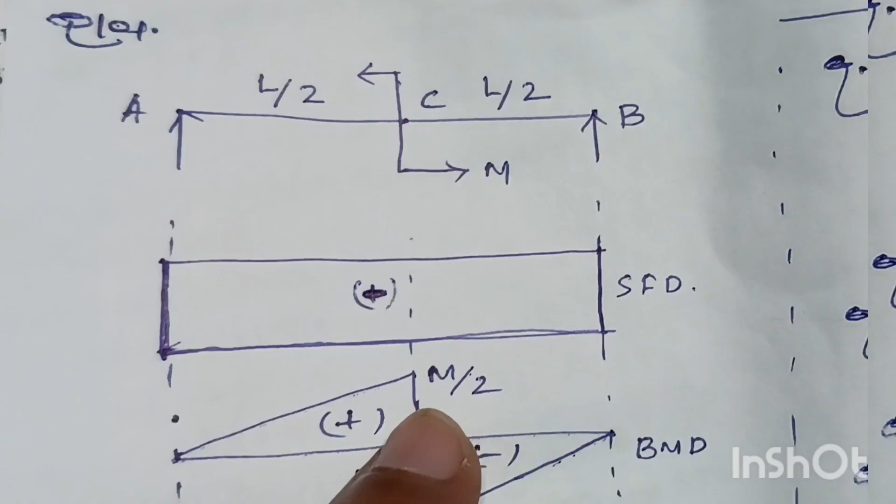Sudden change in bending moment diagram at the point of application of couple. At the point where the couple acts, there is a sudden change in the bending moment diagram.

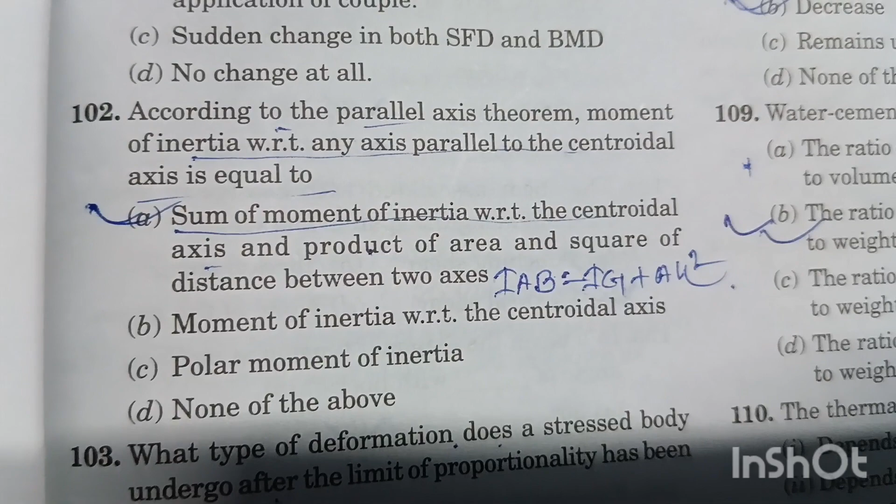Question number 102: According to the parallel axis theorem, moment of inertia with respect to any axis parallel to the centroidal axis is equal to the sum of moment of inertia with respect to the centroidal axis and product of area and square of the distance between two axes. Option A is right answer.

Question number 103: What type of deformation does a stressed body undergo after the limit of proportionality has been crossed? Plastic deformation. If the limit of proportionality is crossed, the body undergoes plastic deformation. Option B is right answer.

Question number 104: Saint Venant's theory for elastic failure is also known as maximum principal strain theory. Option B is right answer. Saint Venant's theory of failure explains the failure of a ductile material when subjected to stress, and it considers the maximum principal strain theory for failure.

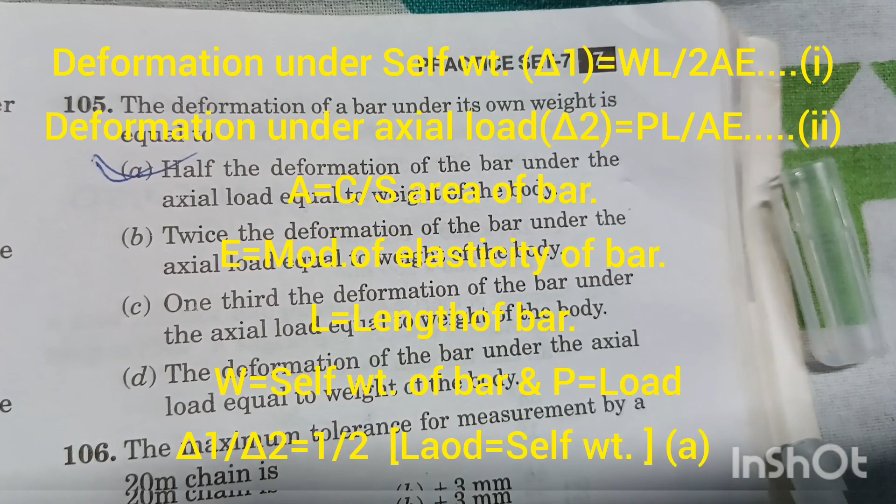Question number 105: The deformation of a bar under its own weight is equal to half the deformation of the bar under the axial load equal to the weight of the body. Option A is right answer.

Question number 106: The maximum tolerance for measurement by a 20-meter chain is plus minus 5 mm. Option C is right answer. Or plus minus 8 mm for a 30-meter chain.

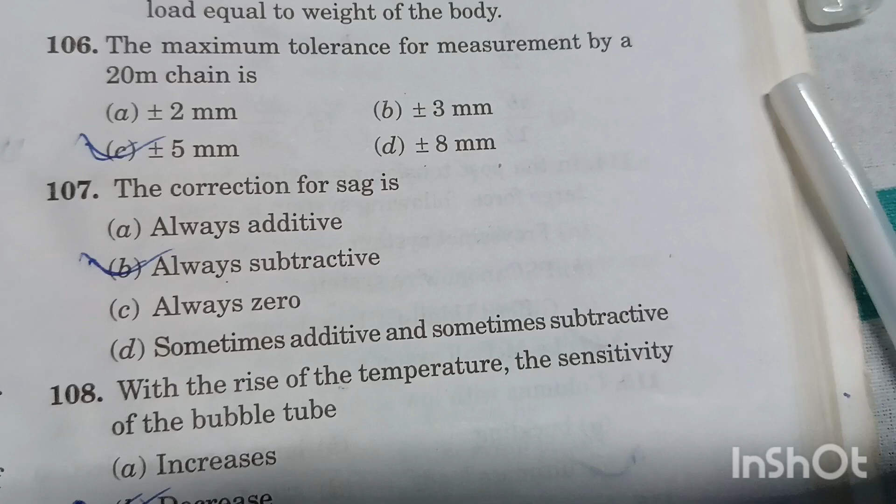Question number 107: The correction for sag is always subtractive or negative. Option B is right answer.

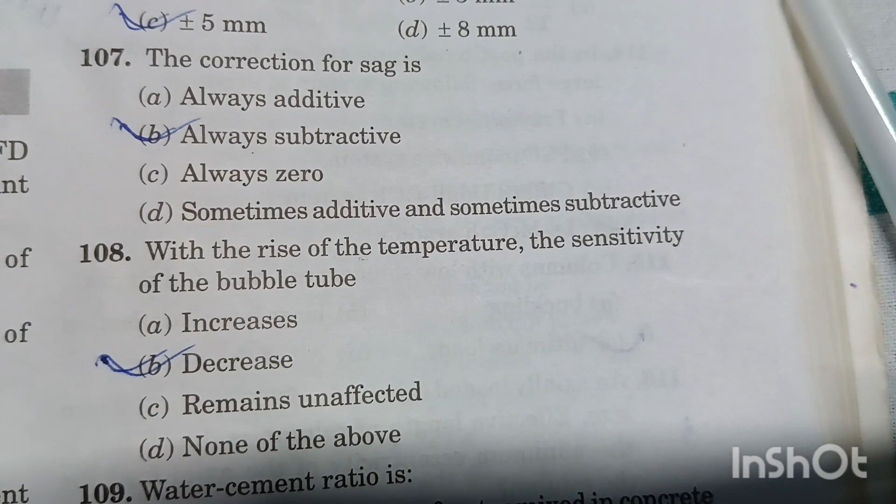Question number 108: With the rise of temperature, the sensitivity of the bubble tube decreases. Option B is right answer.

Question number 109: Water cement ratio is the ratio of weight of water mixed in concrete to the weight of cement used. Option B is right answer.

Question number 110: The thermal coefficient of concrete depends on nature of concrete, depends on cement content, depends on relative humidity, and depends on the size of section. So option D is right answer, all of the above.

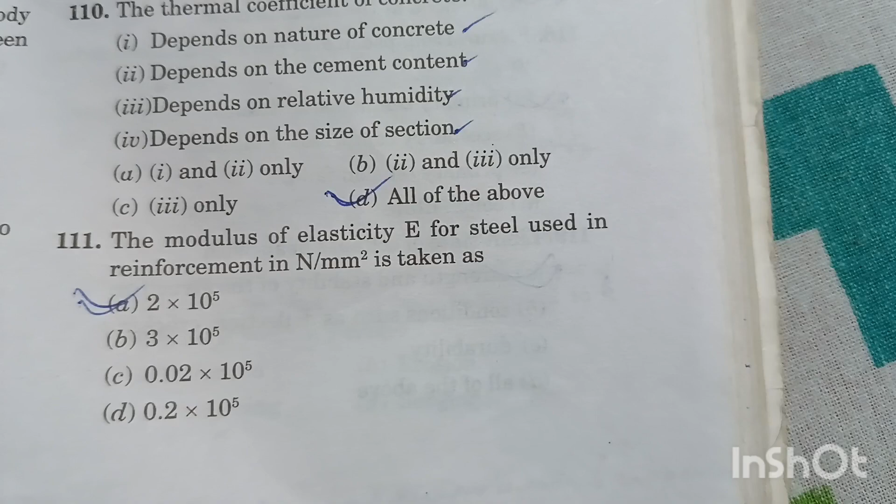Question number 111: The modulus of elasticity E for steel used in reinforcement in Newton per millimeter square is taken as 2 into 10 to the power 5 Newton per millimeter square. Option A is right answer.

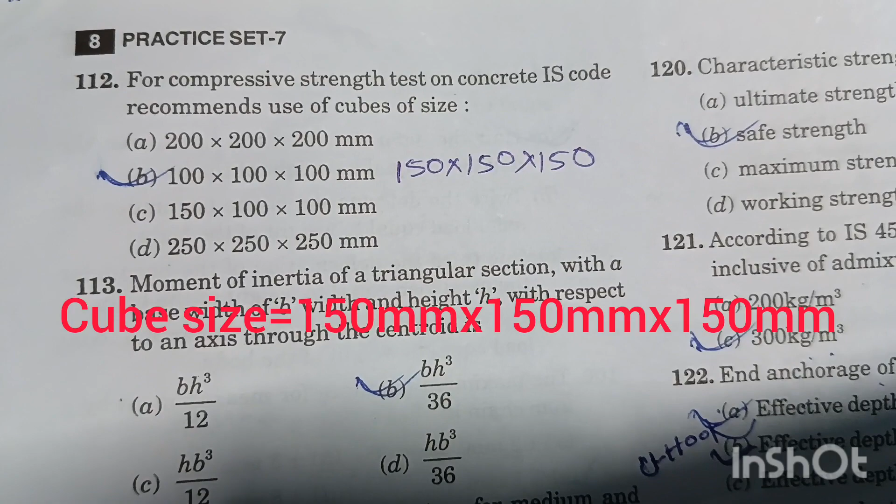Question number 112: For compressive strength test on concrete, IS code recommends the use of cubes of size 150 by 150 by 150. So option B should be the answer.

Question number 113: Moment of inertia of a triangular section with base width B and height h with respect to an axis through the centroid is BH cube by 36. Option B is right answer.

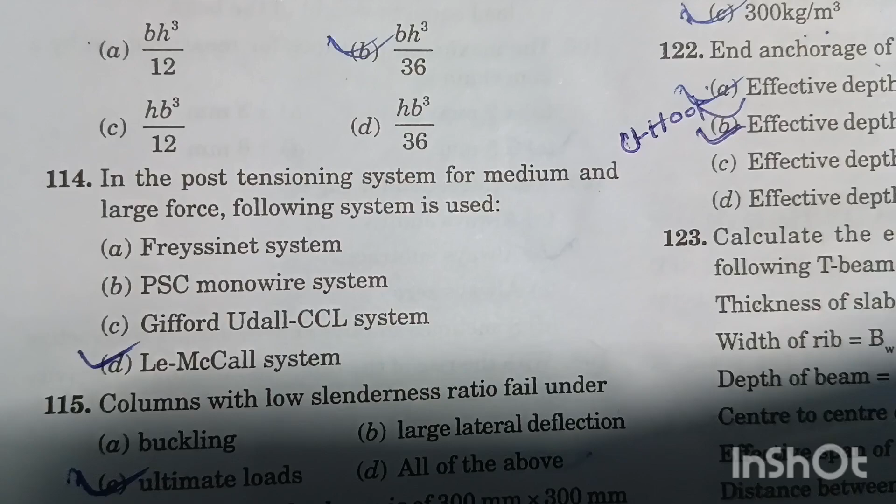Question number 114: In the post tensioning system for medium and large force, the following system is used: Le-McCall system. Option D is right answer. This question has appeared before, remember it.

Question number 115: Columns with low slenderness ratio fail under ultimate loads by crushing. Option C is right answer. Low slenderness ratio means a short column, and it fails by crushing, while a long column fails by buckling. So option C is right answer.

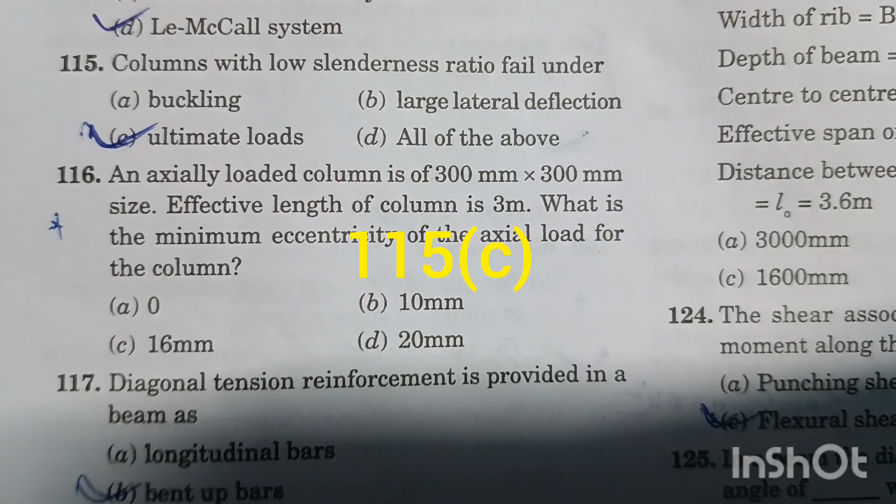Question number 116: An axially loaded column is 300 mm into 300 mm size. Effective length of column is 3 meter. What is the minimum eccentricity of the axial load for the column?

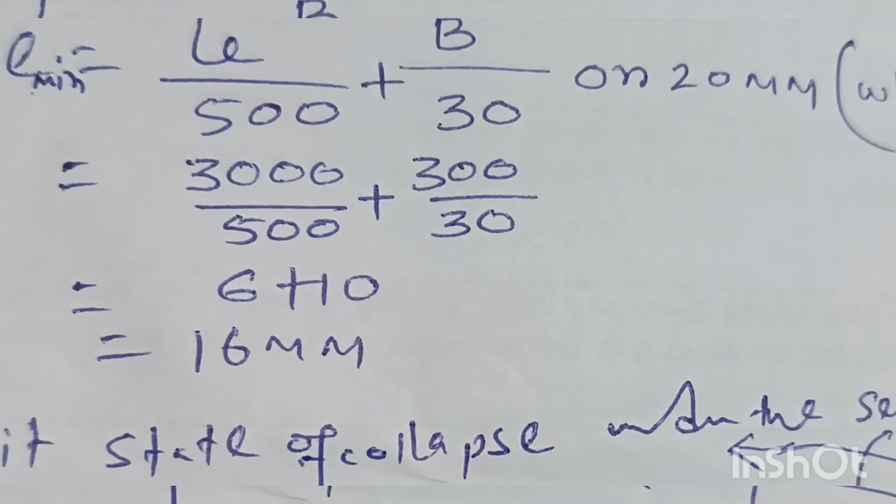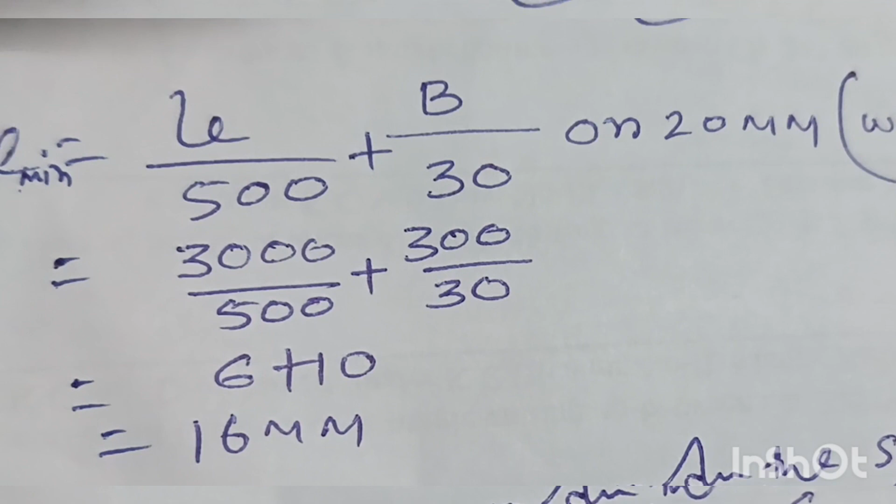The minimum eccentricity formula we know: E minimum equals LE divided by 500 plus B by 30, or 20 mm, whichever is more. LE is effective length of the column and B is least dimension of the column. Effective length is given as 3 meter and least dimension of the column is 300 mm. From there we calculate and get 16 mm and 20 mm, whichever is more, so 20 mm is the right answer. Option D is right answer, 20 mm.

Question number 117: Diagonal tension reinforcement is provided in a beam as bent up bars. Option B is right answer.

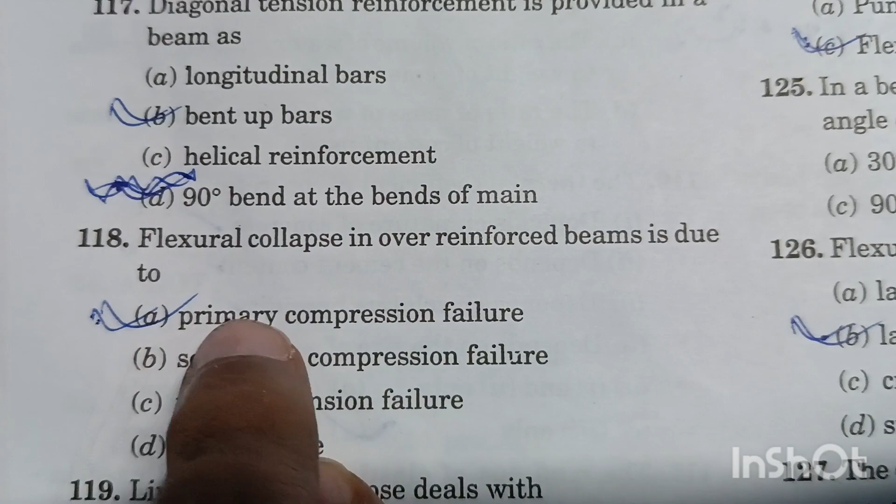Question number 118. Flexural collapse in over reinforced beam is due to primary compression failure. Option A is the right answer.

Question number 119. Limit state of collapse deals with the strength and stability of the structure. Option A is the right answer. So limit state is of two types, one is limit state of collapse, which deals with that.

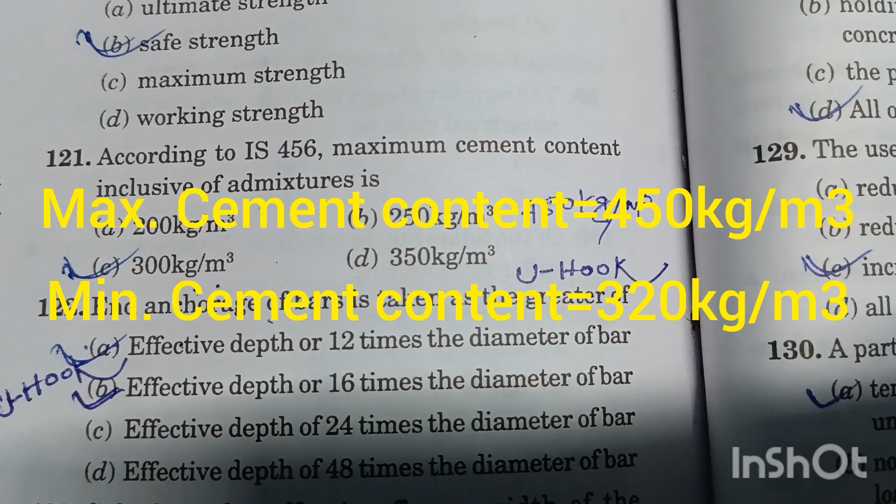U hook, effective depth, or 16 times the diameter of the bar. Option B is the right answer.

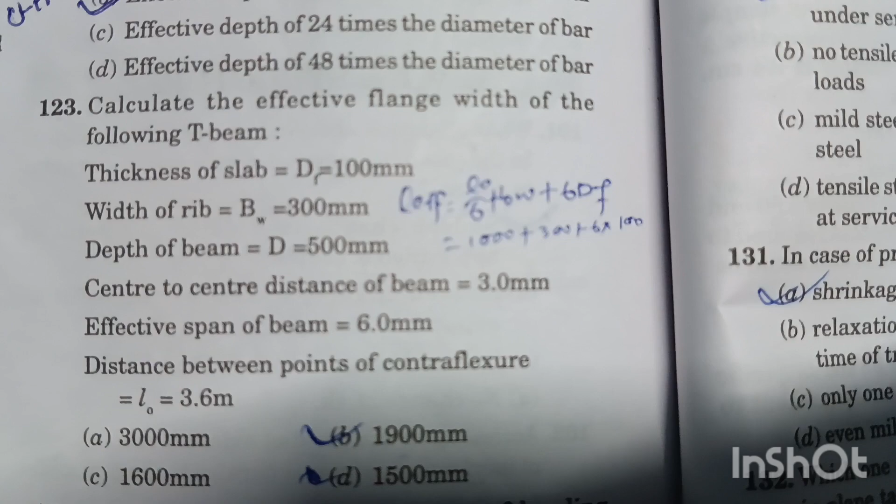Question number 123, calculate the effective flange width of the following T-beam. Thickness of the slab is 100 mm, width of rib or breadth of rib is 300 mm, depth of beam D equal to 500 mm, center to center distance of beam 3 meter, effective span of the beam 6 meter, and distance between points of contraflexure L0 equal to 3.6 meter.

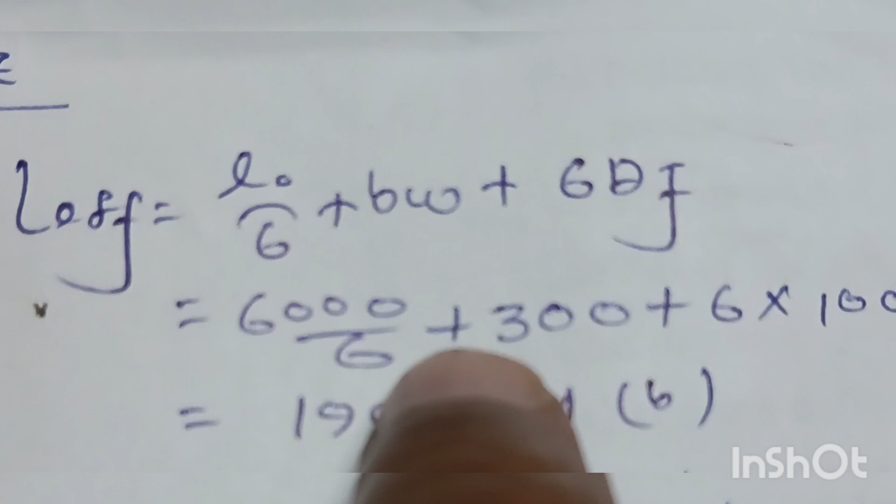So what will be the effective length of the T-beam? We know a formula for finding the effective length of a T-beam: L effective equal to L0/6 plus BW plus 6 into DF. We know L0 value is 6000 mm, BW value is 300 mm, and DF value is 100 mm. If we put all values in the equation, we get L effective as 1900 mm. Option B is the right answer.

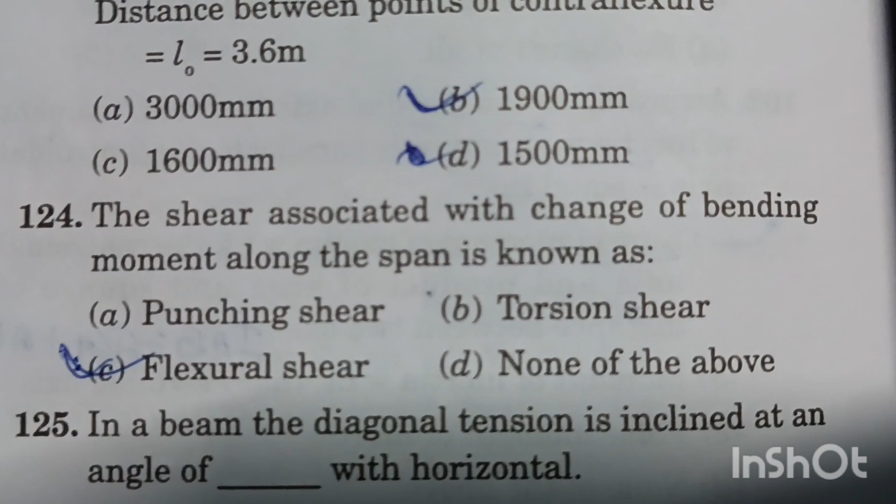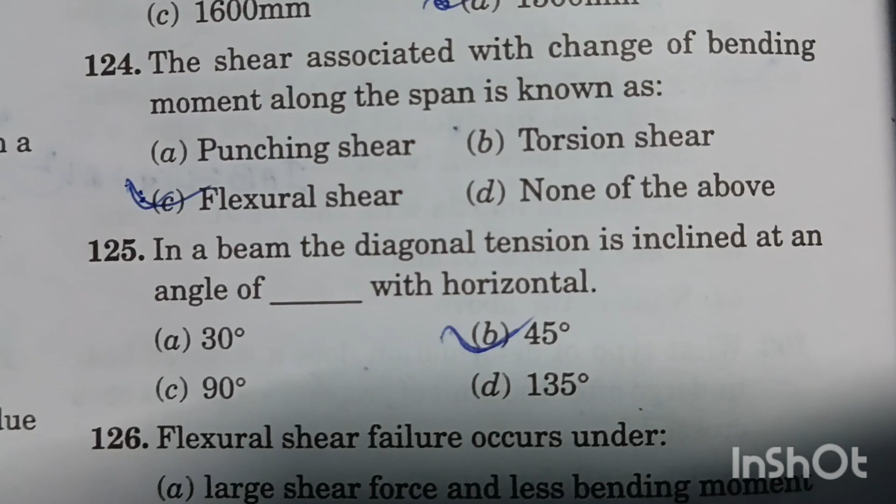Question number 125, in a beam the diagonal tension is inclined at an angle of 45 degrees with horizontal. Option B is the right answer. And in case of diagonal compression it will be 135 degrees.

Question number 126, flexural shear failure occurs under large bending moment and less shear force. Option B is the right answer.

Question number 127, the design shear strength in concrete depends on. Option C is the right answer: percentage of tension steel. Option C is the right answer, and grade of concrete.

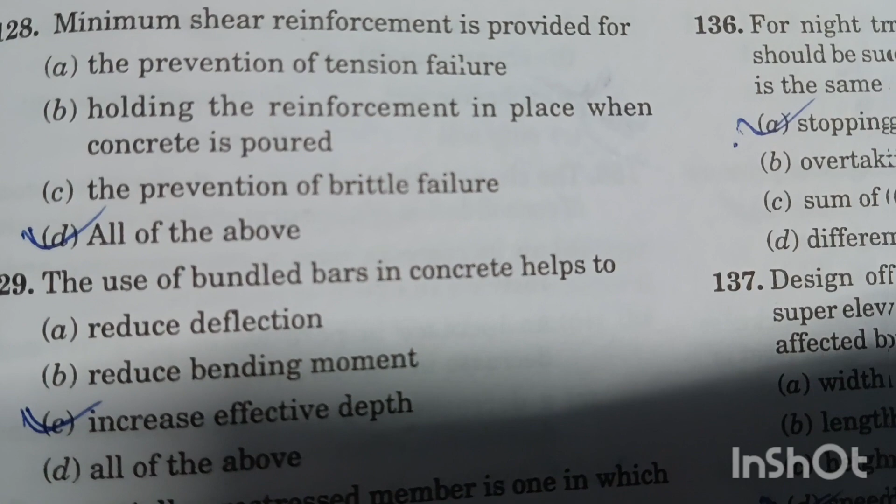Question number 128, minimum shear reinforcement is provided for: Option A, prevention of tension failure; Option B, holding the reinforcement in place when concrete is poured; Option C, prevention of brittle failure. Option D is the right answer, all of the above.

Question number 129, the use of bundled bars in concrete helps to increase the effective depth. Option C is the right answer.

Question number 130, a partially pre-stressed member is one in which tensile stresses and cracking are permitted under service loads. Option A is the right answer.

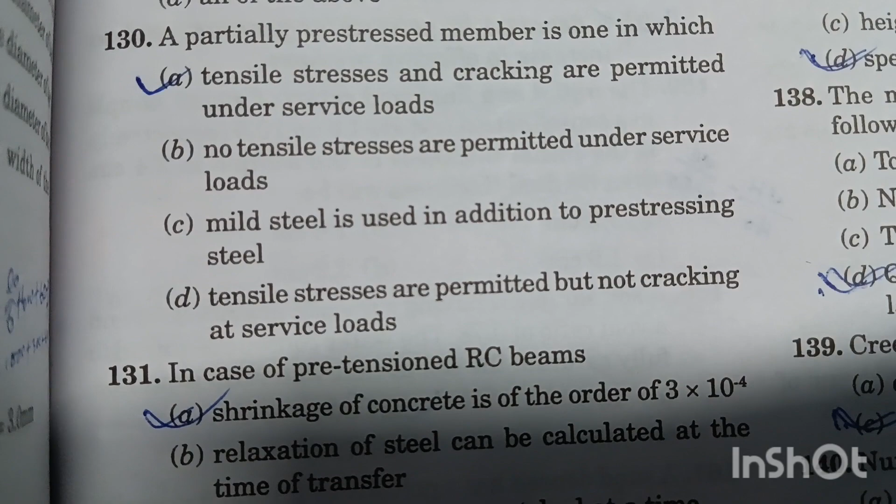Question number 131, in case of pre-tensioned RC beam, shrinkage of concrete is of the order of 3 into 10⁻⁴. Option A is the right answer.

Question number 132, which of the following instruments is used in plane table surveying for the measurement of horizontal and vertical distances directly? Option B is the right answer, telescope alidade.

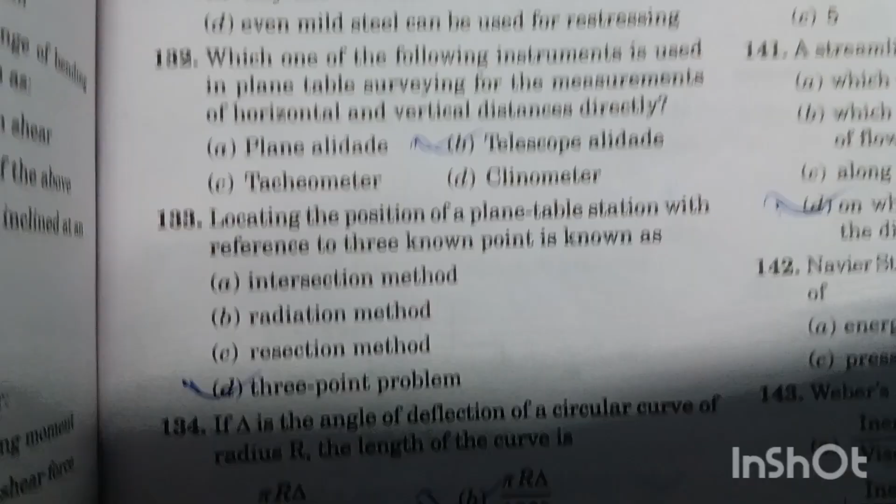Question number 133, locating the position of a plane table station with reference to 3 known points is known as the 3-point problem. Option D is the right answer.

Question number 134, if delta is the angle of deflection of a circular curve of radius r, the length of the curve will be pi r delta divided by 180 degrees. Option B is the right answer.

Question number 135, radar speedometer is used to measure spot speed. Option A is the right answer, spot speed of a moving vehicle.

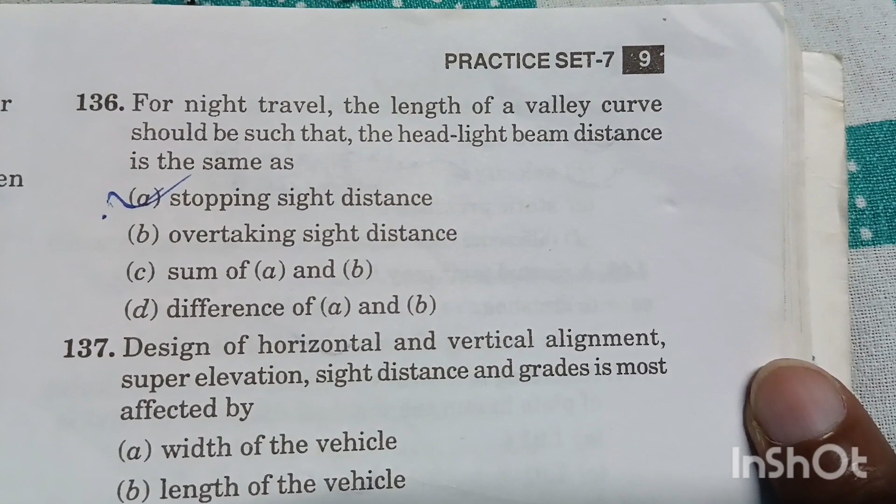Question number 136, for night travel, the length of a valley curve should be such that the headlight beam distance is the same as the stopping sight distance. Option A is the right answer.

Question number 137, design of horizontal and vertical alignment, super elevation, sight distance, and grades is most affected by speed of the vehicle. Option D is the right answer.

Question number 138, the magnitude of tire pressure controls the following. Option D is the right answer, quality of material to be used in the upper layers of pavement.

Question number 139, creeping of rail can be checked by anchors, called creep anchors. Option C is the right answer. Creep is the longitudinal movement of rail with respect to the sleeper, and this creep can be checked by the creep anchors.

Question number 140, number of fish bolts per fish plate is 4. Option B is the right answer.

Question number 141.

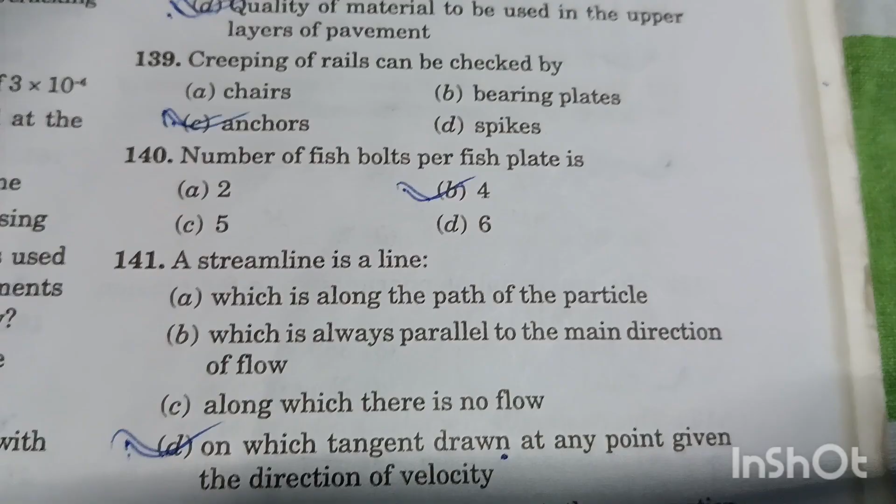A streamline is a line on which the tangent drawn at any point gives the direction of velocity. Option D is the right answer.

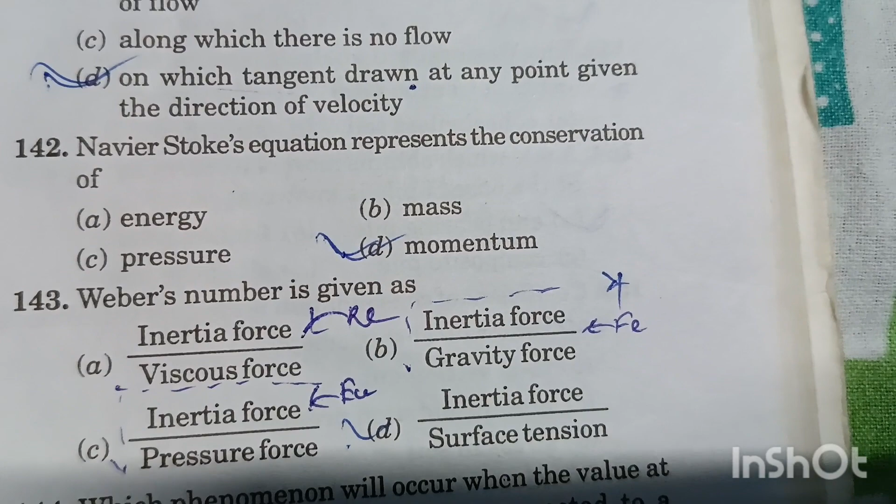Question 142. The Navier-Stokes equation represents the conservation of momentum. Option D is the right answer.

Question 143. Weber's number is given as inertia force by surface tension. Option D is the right answer. Inertia force by viscous force is Reynolds number, and the root over of inertia force by gravity force is Froude number, and root over of inertia force by pressure force is known as Euler's number, and Mach number equals root over of inertia force divided by elastic force.

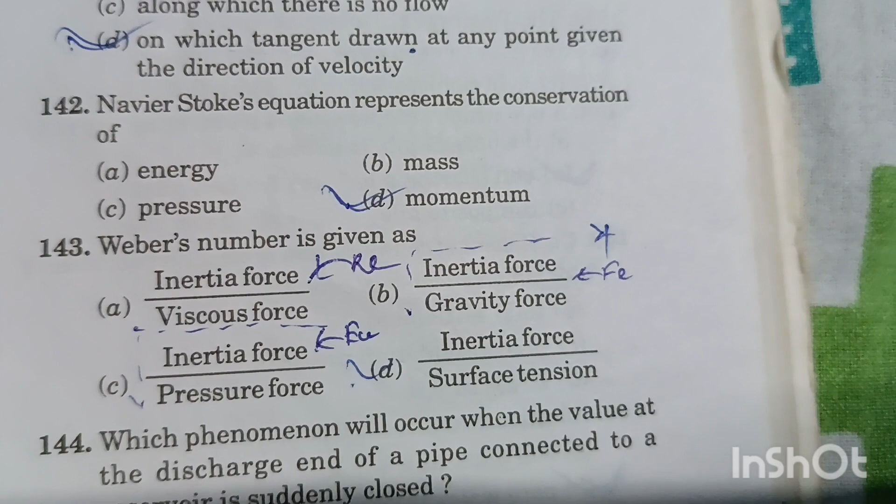Question 144. Which phenomenon will occur when the valve at the discharge end of a pipe connected to a reservoir is suddenly closed? That is water hammering. Option C is the right answer.

Question 145. Anemometer is used to measure wind velocity and wind speed. Option B is the right answer.

Question 146. A riveted joint may fail: option A in shear, option B in bearing, option C in crushing of rivets. Option D is the right answer, all of the above.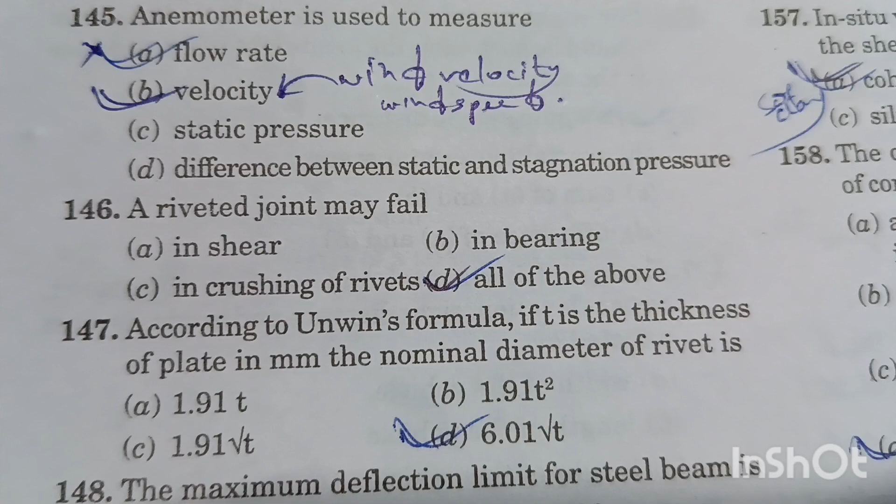Question 147. According to Unwin's formula, if T is the thickness of plate in mm, the nominal diameter of the rivet is given by option D, 6.01 into root over of T.

Question 148. The maximum deflection limit for a steel beam is span by 325. Option C is the right answer.

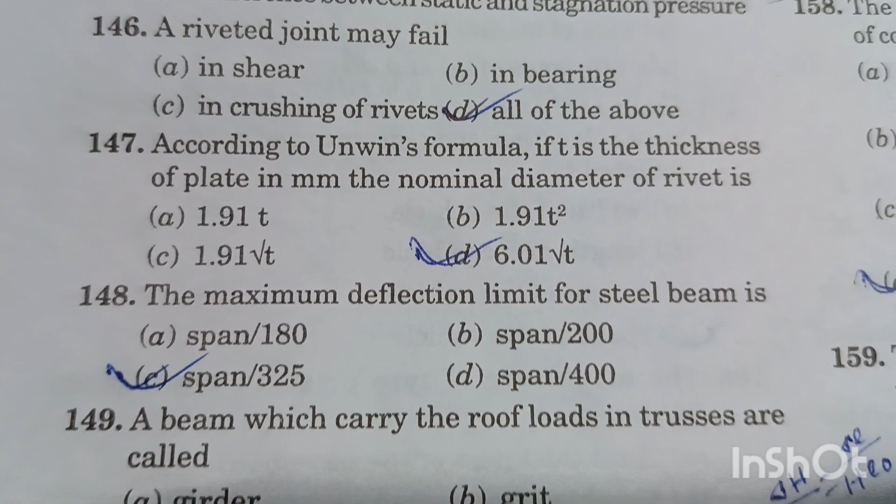Question 149. A beam which carries the roof loads in trusses is called a purlin. Option C is the right answer.

Question 150. A plastic hinge is a zone of yielding due to flexure. Option C is the right answer.

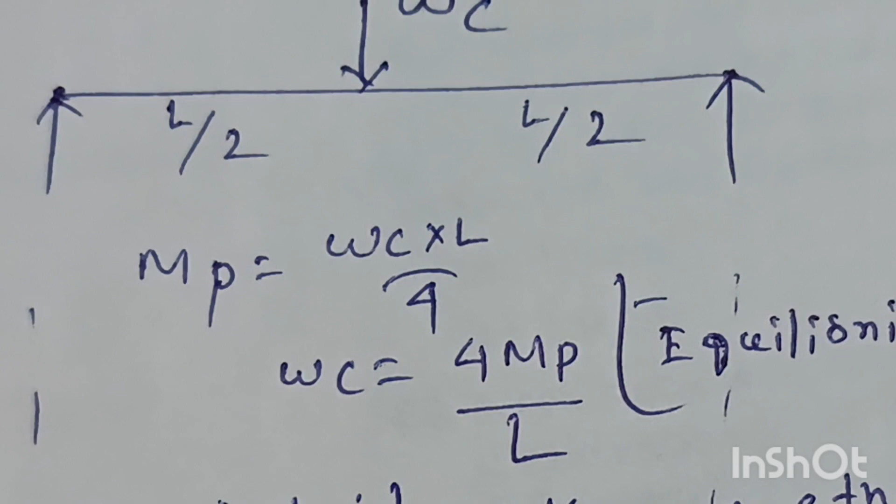Question 151. The collapse load for a simply supported beam of length L and concentrated load W at center is asked. A simply supported beam subjected to a central concentrated load W has this load as the collapse load, because it causes the plastic hinge to form, and the plastic hinge forms exactly at the mid point since the collapse load acts there. Plastic moment will be equal to the maximum bending moment, WL/4. So collapse load will be equal to Wc = 4 Mp / L. Option A is the right answer for this question.

Question 152. The maximum slenderness ratio for a tension member is 400. Option C is the right answer.

Question 153. The Westergaard analysis is suitable for stress distribution under a loaded area for stratified soil. Option D is the right answer.

Question 154. A pile which obtains most of its carrying capacity at the base of the pile is known as an end bearing pile. Option A is the right answer.

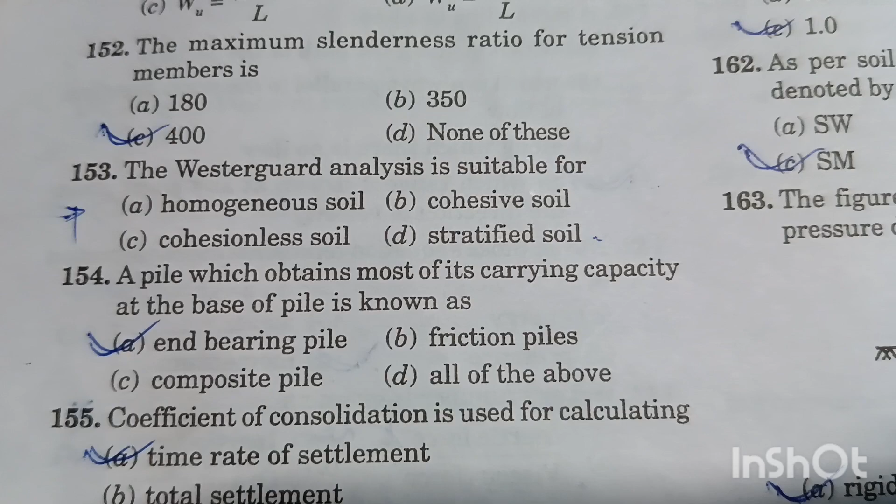Question 155. The coefficient of consolidation is used for calculating the time rate of settlement. Option A is the right answer.

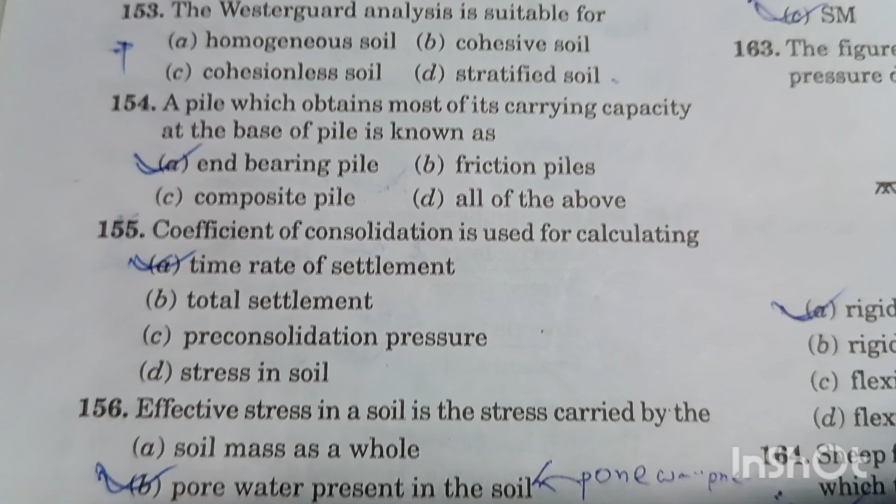Question 156. Effective stress in a soil is the stress carried by the solid present in the soil mass. Option D is the right answer. If it had asked about pore water pressure, that would be the pressure from pore water present in the soil. Total stress on the soil equals the summation of pore water pressure and effective pressure.

Question 157. The in-situ vane shear test is conducted to determine the shear strength of cohesive soil. Option A is the right answer, for example soft clay.

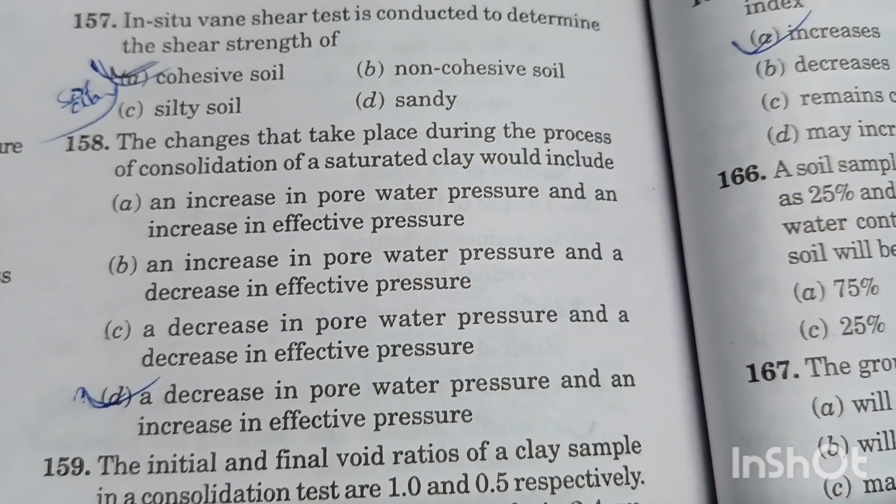Question 158. The changes that take place during the process of consolidation of a saturated clay include a decrease in pore water pressure and an increase in effective pressure. Option D is the right answer, because during consolidation the water is squeezed out, so the pore water pressure decreases and the effective stress becomes higher.

Question 159. The initial and final void ratios of a clay sample in a consolidation test are 1 and 0.5 respectively. If the initial thickness of the sample is 2.4 cm, find the final thickness. We know a formula for this.

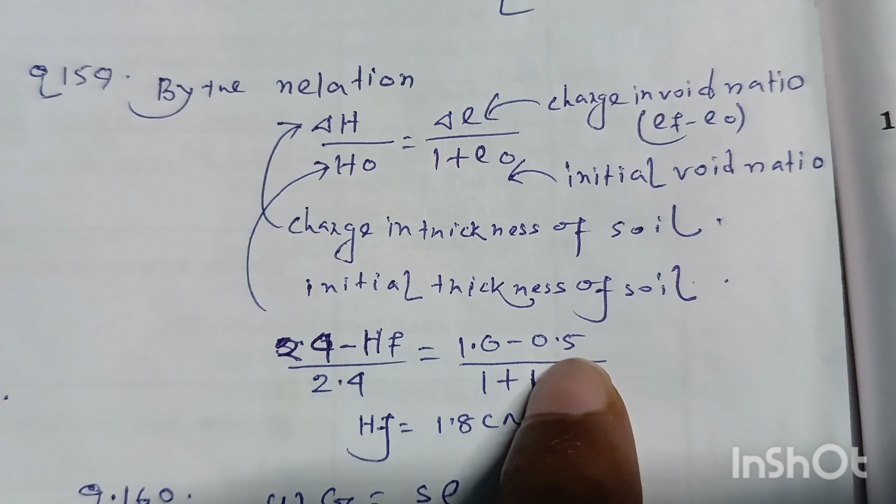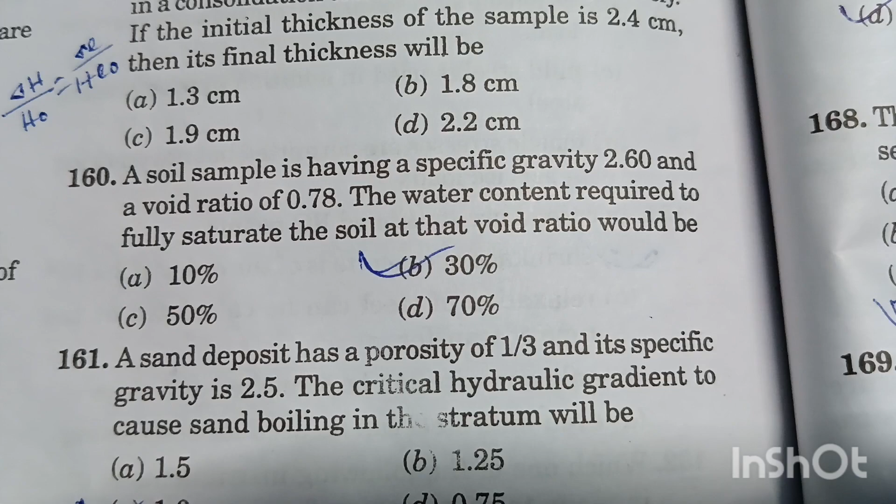Question 160. A soil sample has a specific gravity of 2.60 and a void ratio of 0.78. The water content required to fully saturate the soil at that void ratio would be...

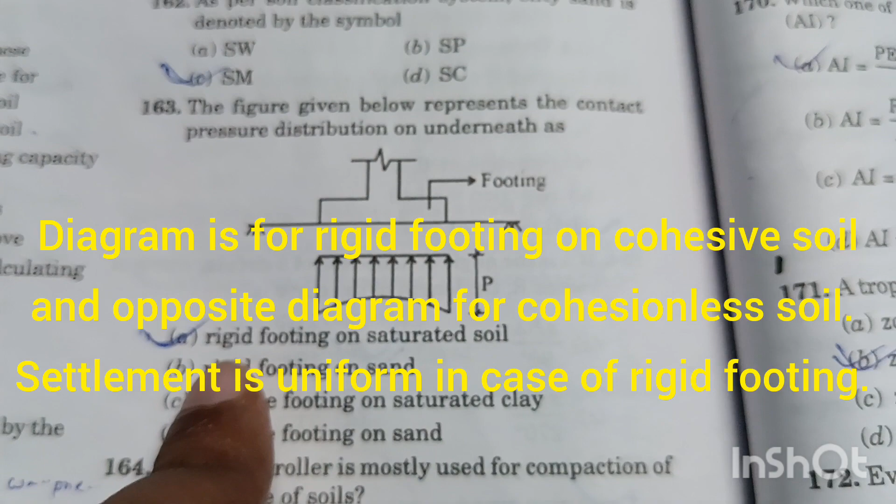Question number 163: The figure given below represents the contact pressure distribution on the underneath as. Option A will be the right answer in case of cohesive soil - rigid footing on saturated soil. This diagram is for rigid footing on saturated soil. Option A is the right answer.

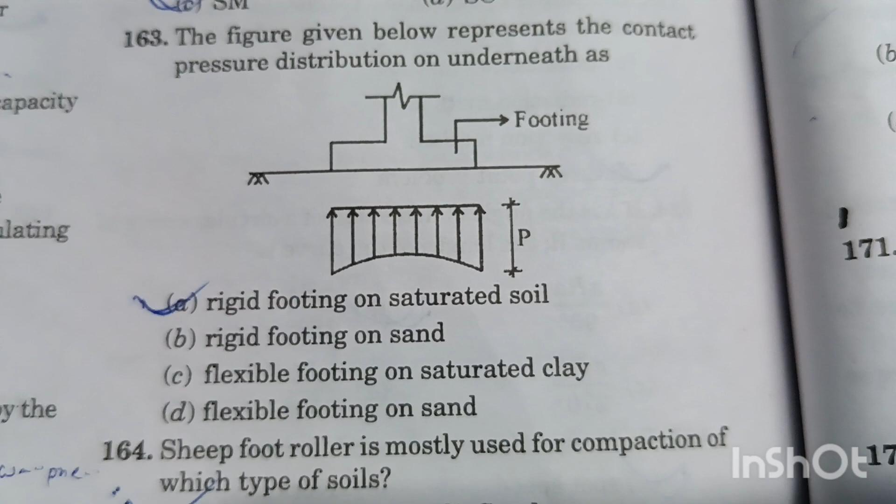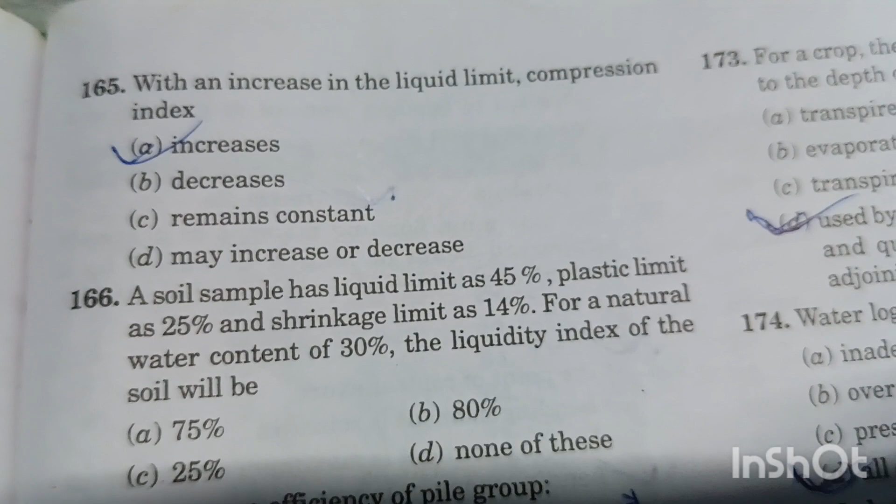Question number 165: With an increase in the liquid limit, the compression index increases because we know the formula of compression index equal to 0.009 into (LL minus 10), where LL is the liquid limit for undisturbed soil. For disturbed soil it becomes CC equal to 0.007 into (LL minus 10). So liquid limit increasing will definitely increase compression index as per this formula. Option A is right answer.

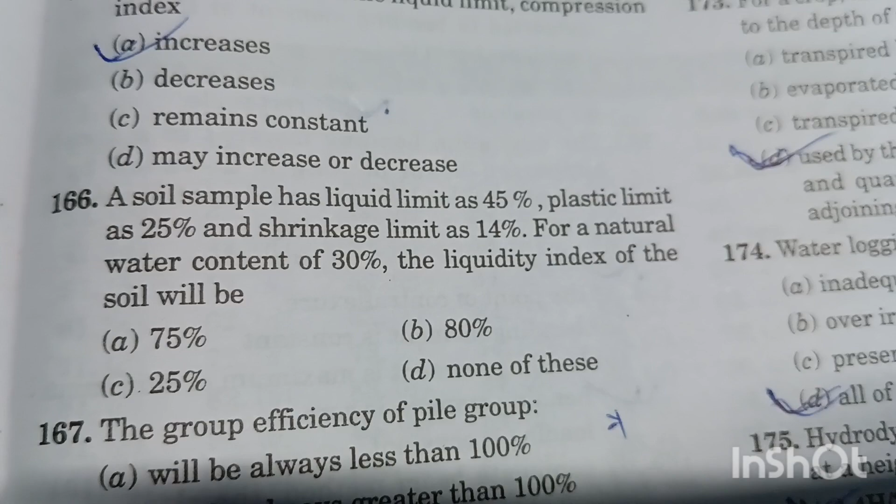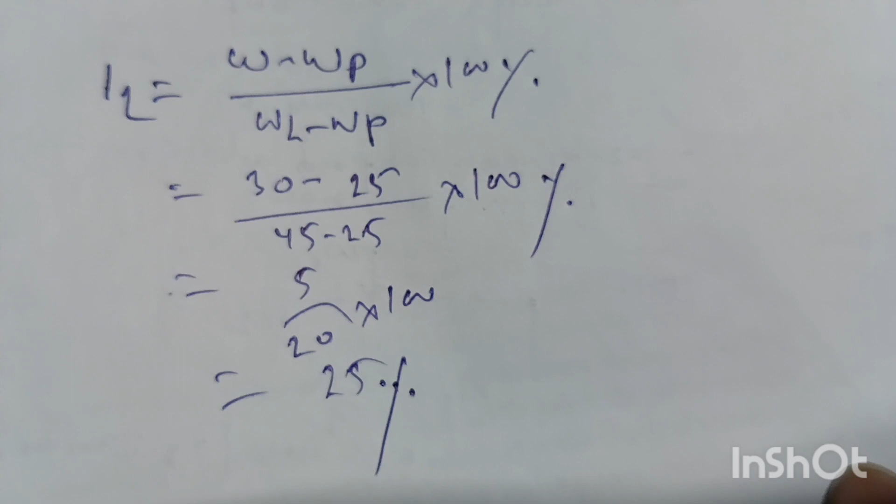Question number 166: A soil sample has a liquid limit of 45%, plastic limit of 25%, and shrinkage limit of 14%. For a natural water content of 30%, liquidity index of the soil will be IL equal to W minus WP divided by WL minus WP into 100%. Here W is the natural water content given as 30%, plastic limit given as 25%, and liquid limit given as 45%. Putting these values into the equation, we get liquidity index equal to 25%. Option C is right answer.

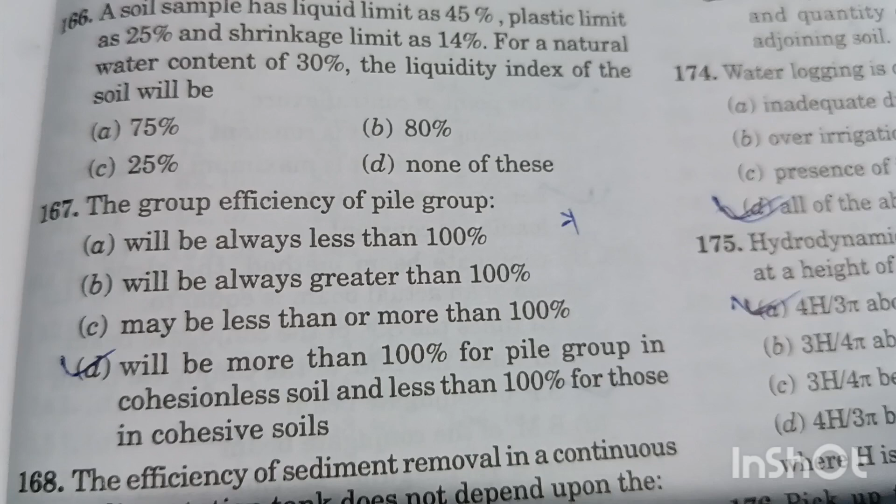Question number 167: The group efficiency of pile group will be more than 100% for pile group in cohesionless soil and less than 100% for those in cohesive soil. Option D is right answer.

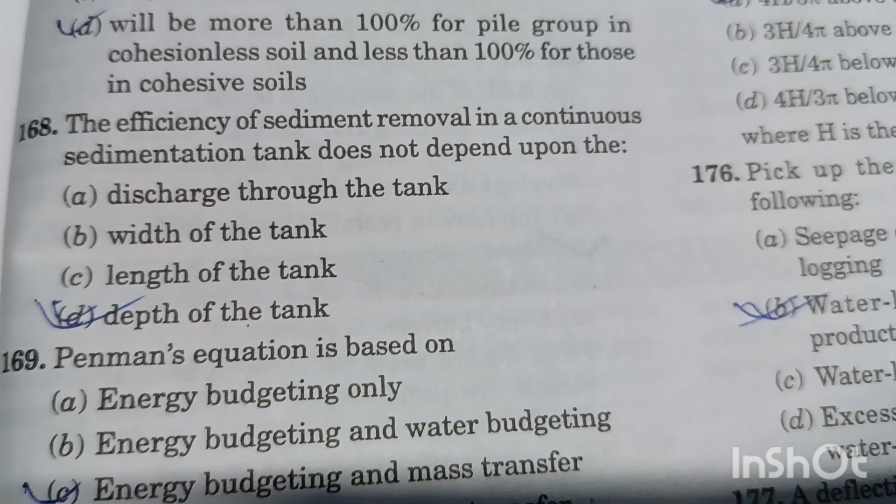Question number 168: The efficiency of sediment removal in continuous sedimentation tank does not depend upon the depth of the tank. Option D is right answer. Efficiency depends on the discharge and surface area, and the width and length of the tank. So option D is the right answer. Question number 169.

Penman's equation is based on energy budgeting and mass transfer. Option C is right answer.

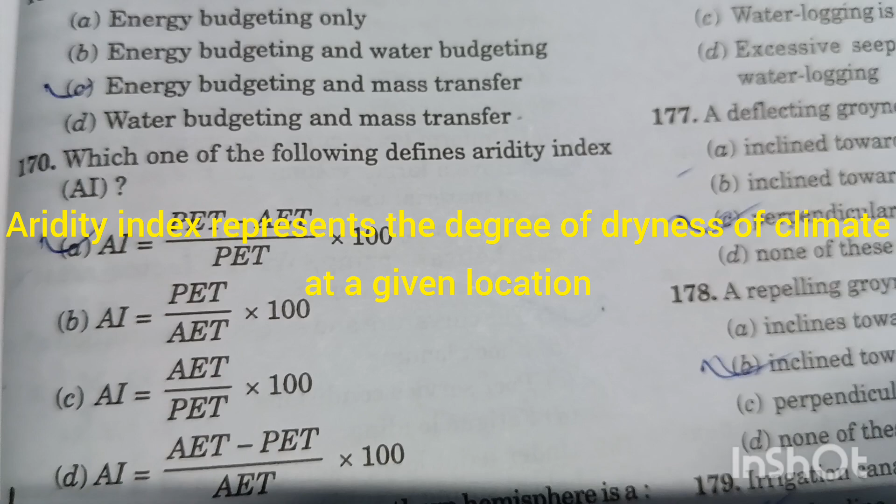Question number 170: Which one of the following defines aridity index? Aridity index equal to PET minus AET divided by PET into 100. Option A is right answer. PET is potential evapotranspiration, AET is actual evapotranspiration. Aridity index is an indication for degree of dryness of climate at a given location.

Question number 171: A tropical cyclone in northern hemisphere is a zone of low pressure with anti-clockwise wind. Option B is right answer.

Question number 172: Evapotranspiration is a phenomenon of a continuous process. Option D is right answer.

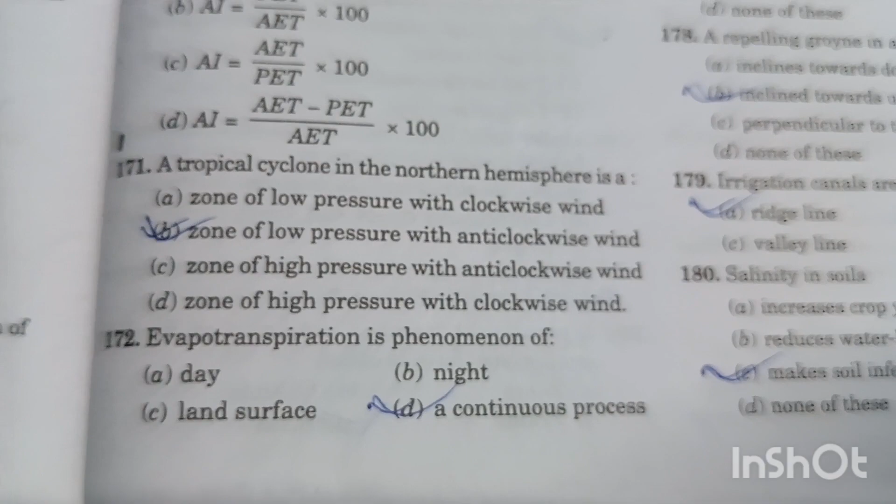Question number 173: For a crop, the consumptive use of water is equal to the depth of water used by the crop in transpiration and evaporation and quantity of water evaporated due to the adjoining soil. Option D is right answer.

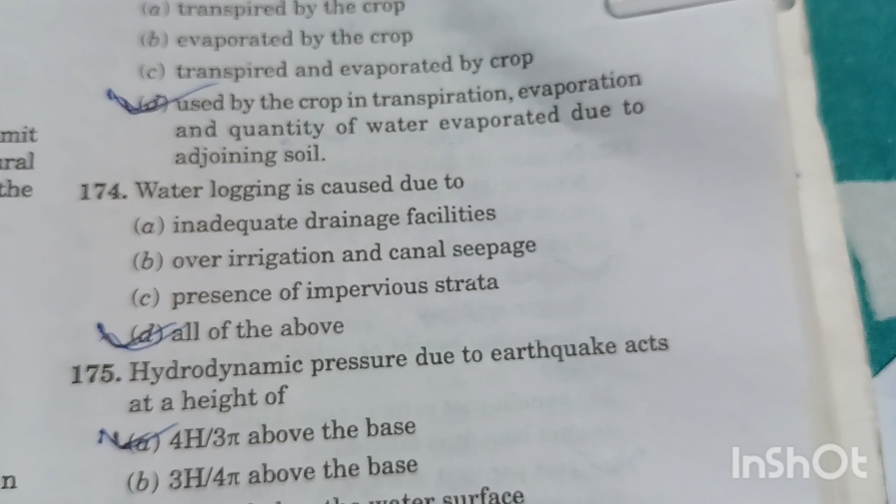Question number 174: Water logging is caused due to option A inadequate drainage facilities, right. Option B over irrigation and canal seepage, right. Option C presence of impervious strata, right. Option D is right answer, all of the above.

Question number 175: Hydrodynamic pressure due to earthquake acts at a height of 4h by 3 pi above the base. Option A is right answer.

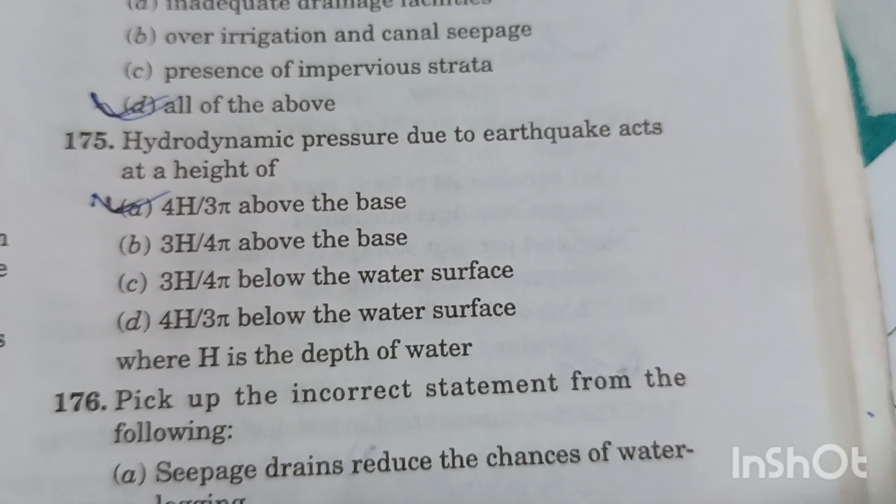Question number 176: Pick up the incorrect statement from the following. Option A, seepage drains reduce the chance of water logging - correct. Option B, water logging makes the land more productive - no. Option C, water logging is caused due to over irrigation - correct. Option D, excessive seepage from canal may cause water logging - correct. So option B is the right answer because it is the incorrect statement.

Question number 177. A deflecting groyne in a river is perpendicular to the bank. Option C is the right answer.

Question number 178. A repelling groyne in a river is inclined towards upstream at 30 degrees. Option B is the right answer.

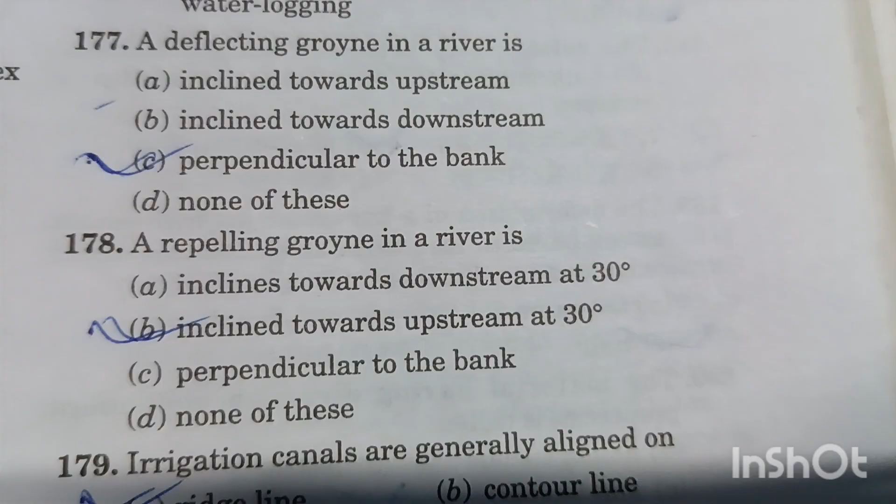Question number 179. Irrigation canals are generally aligned on the ridge line. Option A is the right answer.

Question number 180. Salinity in soil makes the soil infertile. Option C is the right answer.

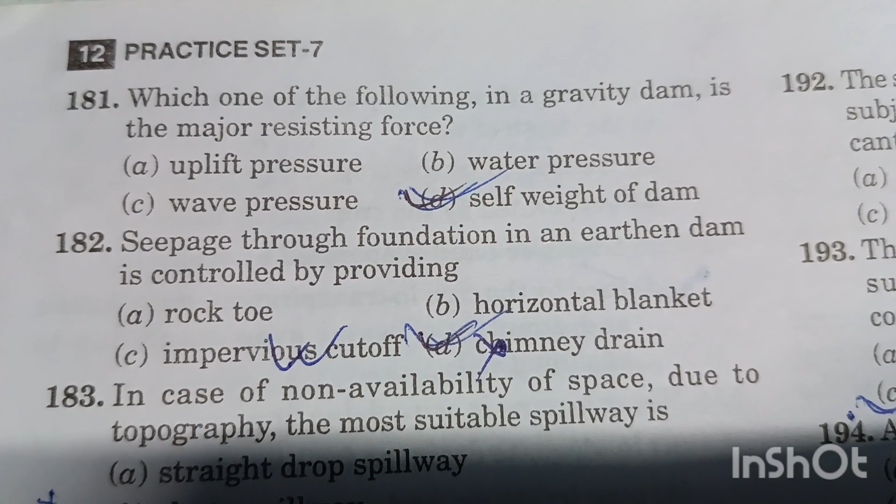Question number 181. Which one of the following in a gravity dam is the major resisting force? That would be the self weight of the dam. Option D is the right answer. It gives the stability of the structure.

Question number 182. Seepage through foundation in an earthen dam is controlled by providing an impervious cutoff. Option C is the right answer.

Question number 183. In case of non-availability of space due to topography, the most suitable spillway is the shaft spillway. Option C is the right answer.

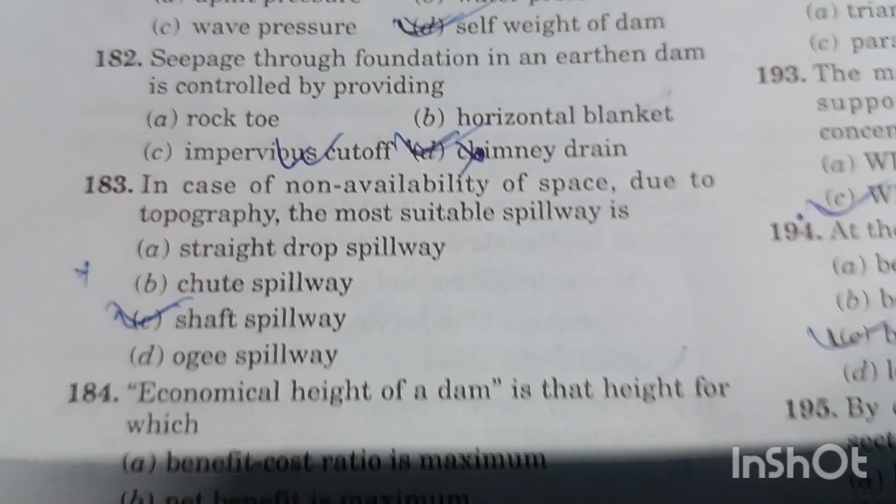Question number 184. Economical height of a dam is that height for which cost per unit storage is minimum. Option C is the right answer.

Question number 185. Which of the following trees yield hardwood? Pine tree, deodar, softwood, so sisam. Option C is the right answer.

Question number 186. Moisture content in a well seasoned timber is 10 to 12%. Option B is the right answer.

Question number 187. Calculate the tensile strain developed in a rod of length 100 mm on application of an axial tensile load of 10 kN. The final length of the rod after the application of load is 100.1 mm. We know the strain formula: delta L by L, meaning change in length divided by original length. Original length is 100 mm, and change in length will be 100.1 minus 100. So if we calculate, the value will be 0.001. Option C is the right answer.

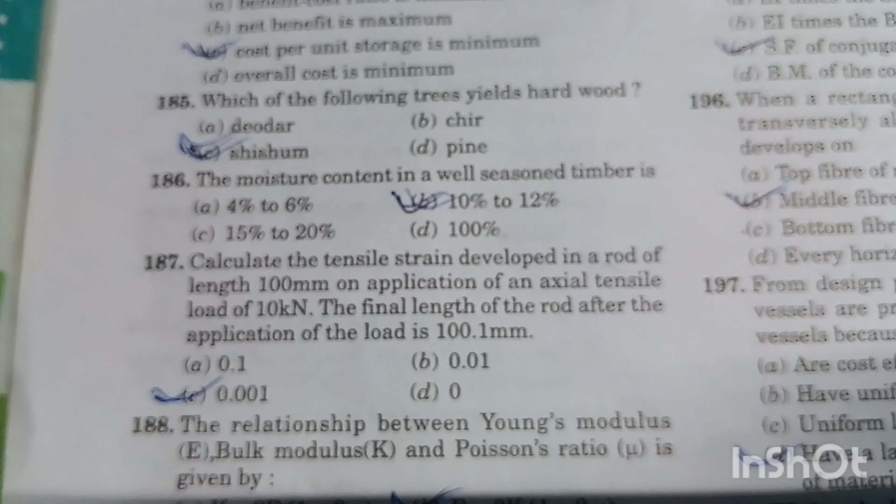Question number 188. The relationship between Young's modulus E, bulk modulus K, and Poisson's ratio mu is given by Option B: E equal to 3K into (1 minus 2 mu).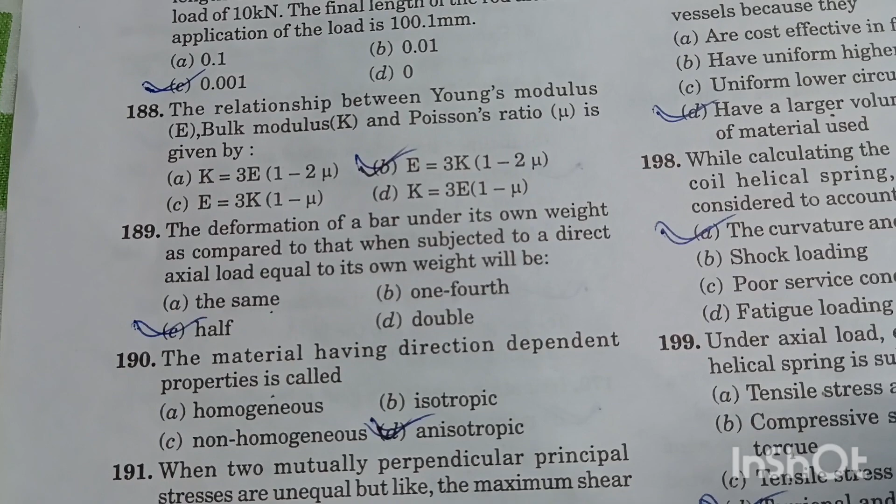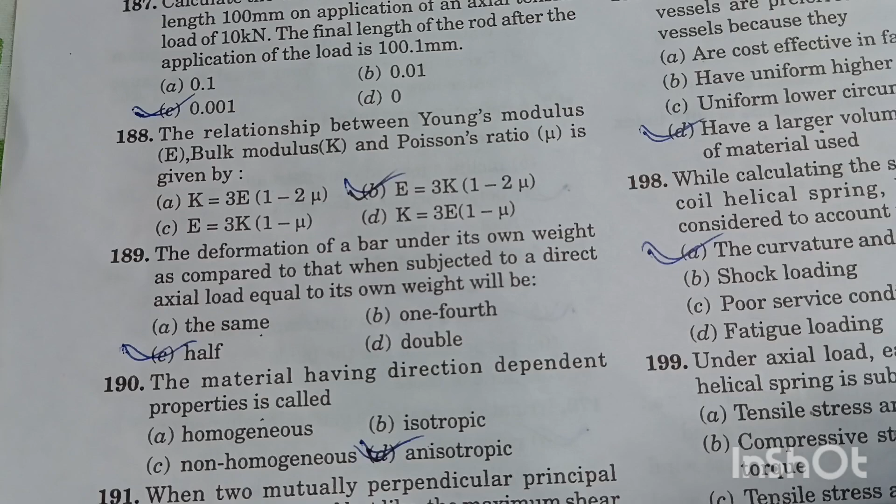Question number 189. The deformation of a bar under its own weight as compared to that when subjected to a direct axial load equal to its own weight will be half. Deformation under its own weight compared to the deformation when subjected to direct axial load equal to its own weight will be half, okay? Option C is the right answer.

Question number 190. The material having direction dependent properties is called anisotropic material. Option D is the right answer.

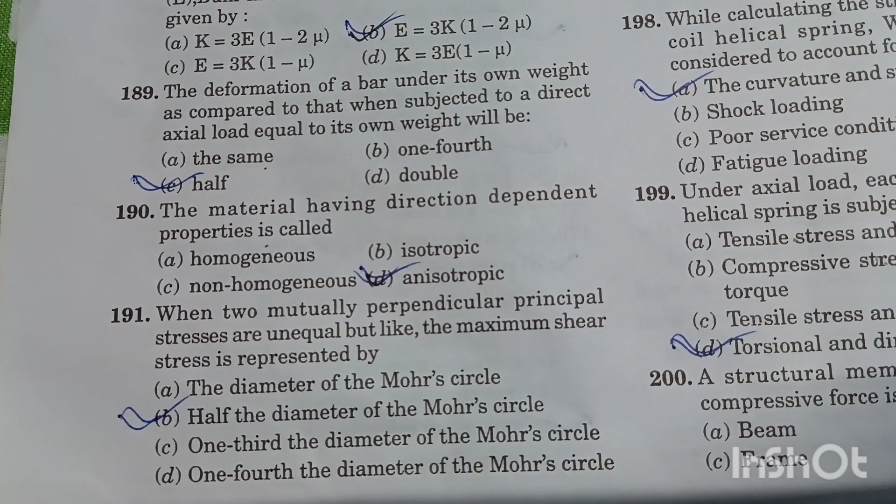Question number 191. When two mutually perpendicular principal stresses are unequal but alike, the maximum shear stress is represented by Option B: half the diameter of the Mohr circle. Option B is the right answer.

Question number 192. The shape of the bending moment diagram for a beam subjected to bending moment at the end of a cantilever beam is a rectangle. Option D is the right answer. Meaning, if a cantilever beam has a bending moment at its end, the bending moment diagram will be a uniform rectangle, and the shear force diagram will be zero. Option D is the right answer.

Question number 193. The maximum bending moment in a simply supported beam of length L loaded by a concentrated load W at the midpoint is given by WL by 4. Option C is the right answer.

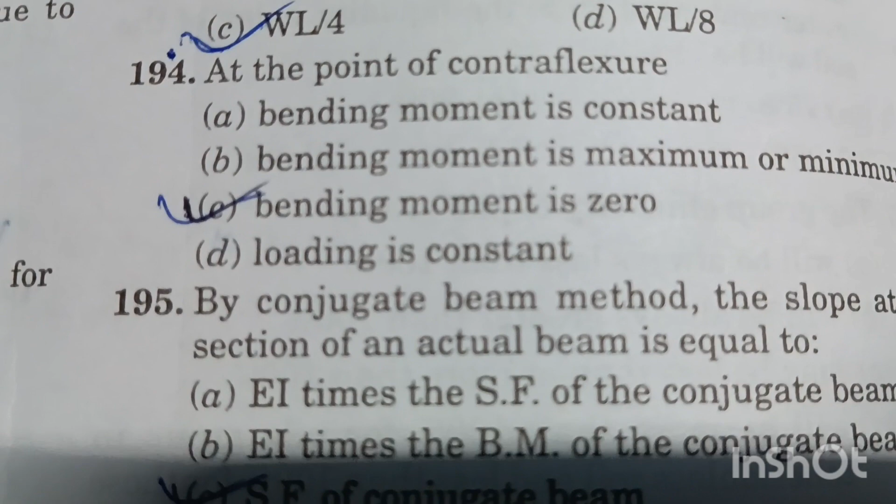Question number 194. At the point of contraflexure, the bending moment is zero. Option C is the right answer. Bending moment is zero and the bending moment changes sign there.

Question number 195. By the conjugate beam method, the slope at any section of an actual beam is equal to the shear force of the conjugate beam. Option C is the right answer. And deflection at any section of the actual beam is equal to the bending moment of the conjugate beam. Remember this.

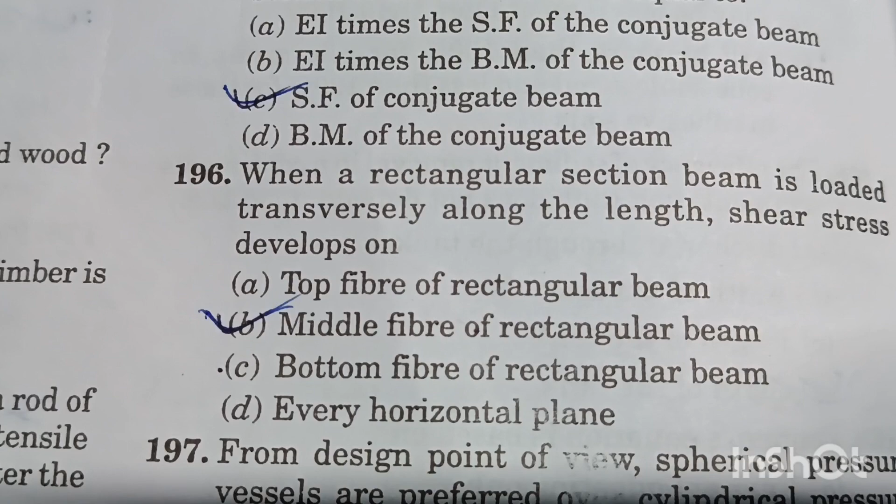Question number 196. When a rectangular section of a beam is loaded transversely along the span, shear stress develops on the middle fiber of the rectangular beam. Option B is the right answer.

Question number 197. From a design point of view, spherical pressure vessels are preferred over cylindrical pressure vessels because they have a larger volume for the same quantity of material used, and they are stronger than cylindrical pressure vessels. Option D is the right answer.

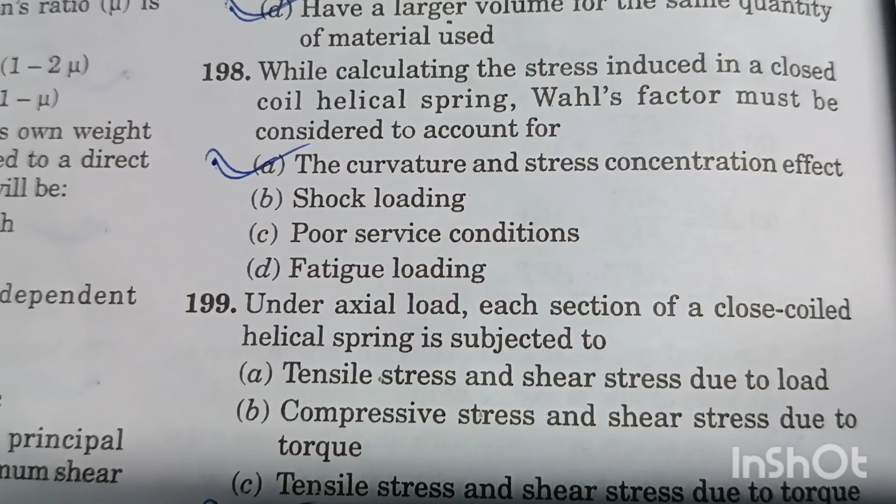Question number 198. While calculating the stress induced in a closed coil helical spring, Wahl's factor must be considered to account for the curvature and stress concentration effect. Option A is the right answer.

Question number 199. Under axial load, each section of a closed coil helical spring is subjected to torsional and direct shear stresses. Option D is the right answer.

Question number 200. A structural member subjected to an axial compressive force is called a strut. Option D is the right answer. If it had said a vertical structural member subjected to an axial compressive force, then it would be called a column, but since it didn't say vertical, it is a strut, because a strut may be horizontal, vertical, or inclined. So option D is the appropriate answer.